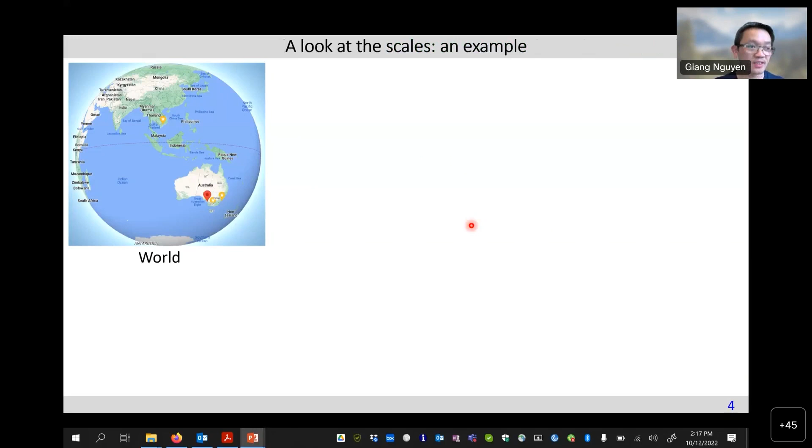So now I would like to take this opportunity to introduce Adelaide as well, but in a bit more technical way. So we have different scales. We are here in Australia, and if you look at Adelaide, this is Adelaide and the surrounding regions, and this is the Adelaide CBD. If we go to the university, the small square here is the main campus of the University of Adelaide. And where is engineering? Engineering is in this small quarter of that square. And our civil engineering is mostly in this building. Of course, we share the facility and building with another school as well.

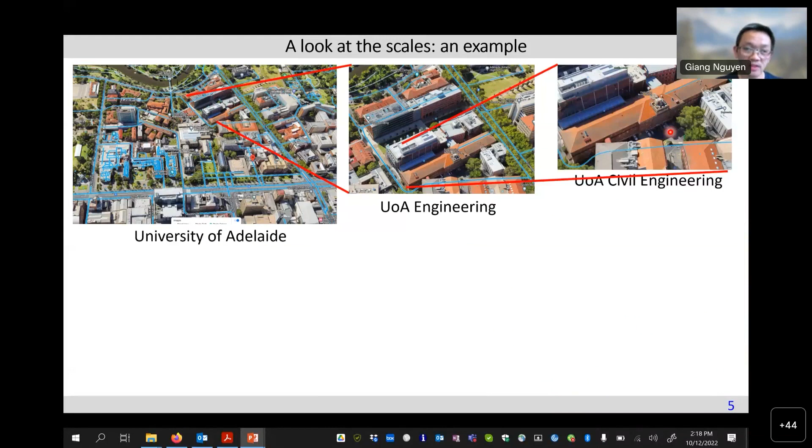We go to the entrance, we have this, but the question here: do we want to go further to a lower scale, like a lecture hall, laboratory, office, and so on? The answer is not always explicit, because it depends a lot on what we want to do. But in order to get an understanding, at least we try something first. Okay, so I want to see if, in granular material or geotechnical engineering, we can map the behavior of one grain to the macro behavior. So it's similar to having the behavior of all academics and predicting the behavior of the department, in the green color here.

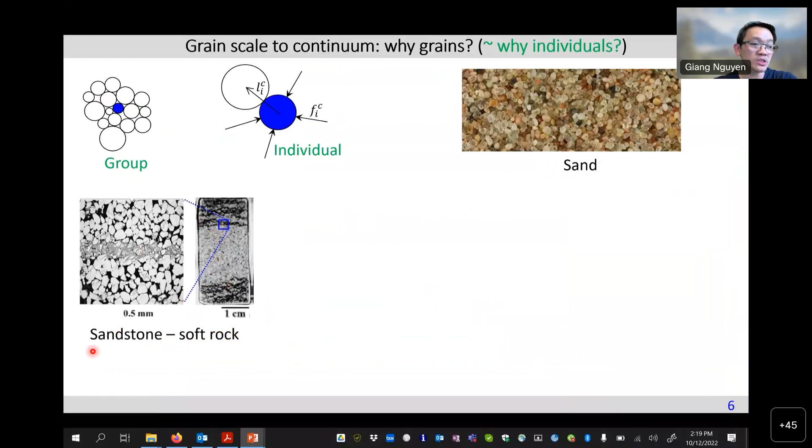So why do we pick grains? Because we are doing geotechnical engineering, and even wider than geotechnical engineering, geomechanics, we have the grain as the underlying structure of many things. Sand, you can see here, sandstone. If we zoom in, we see the grain structure. And the same thing with even hard rock, like granite in this case. The bottom line in this case, or not the lowest, the lower scale in this case is also grain. If you move to metal, you can also see the grain structure.

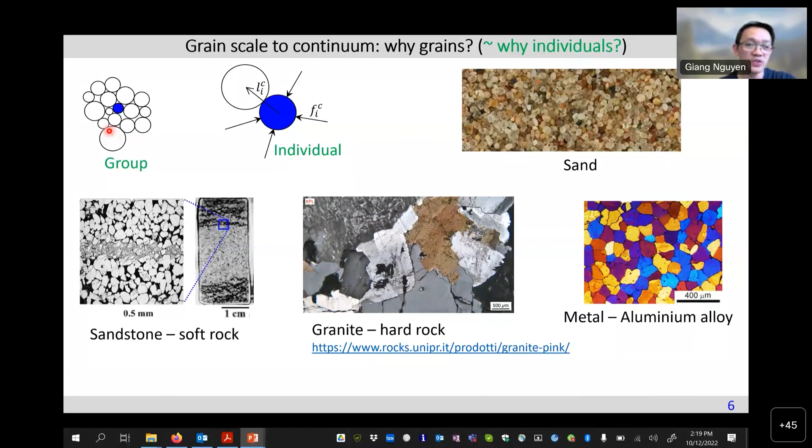So whether we can link the behavior of the individual grains here with the group is still a question. It's still challenging. So I'm not going to solve everything. I'm just giving you a few examples to show you the challenges. Okay, so assuming we know something here, the grain behavior, we have grains in contact with friction. Assuming we know the contact forces, we know the relative displacements between the grains, and to some extent contact surfaces.

So between two grains, we have friction, and we have the rules, simplest rules like Coulomb friction, written in this form, as you can see here. From all these things, can we make a link with the group of grains in this case? So that is the process called homogenization, and there are lots of approaches to homogenize individual grains' behaviors to constitute the macro behavior of a group of grains.

So that is a process called homogenization, or mapping something here to something there at the macro scale, where we have only macro stress, macro strain in incremental form. So it's like making a rule to translate or to predict the behavior or performance of a department based on the behavior of individuals. So in a loose sense, it's like that, and there may be different ways, different challenges as well. I'm sorry, any questions?

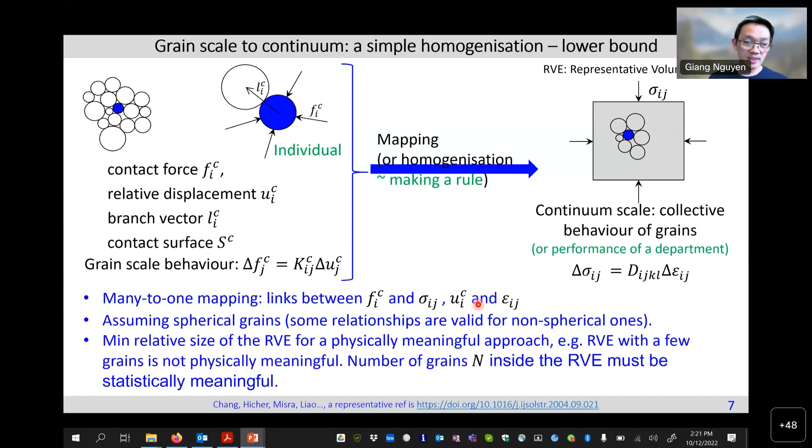Sorry, there is noise. Someone might have disturbance. May I ask everyone to please mute your mic? Yeah, sorry. I thought there were questions. That's why I stopped. That's okay. No, there are no questions, sir. Actually, there is some disturbance. Someone must have joined just now. Yeah, thank you.

So if you are finding it difficult when you read or look at the symbols here, the index notation, my suggestion is to look at this as a whole. So this is the rule we want to make here to predict the behavior of a group of grains or a department based on individual behavior. So that is everything behind what I want to convey here.

Okay. So we have to make a few assumptions here that I won't go into in detail. Say the individual, in this case, should be rounded somehow, like spherical grains, for example. And the group should be big enough because we're dealing with continuum behavior. We are not looking at individual grains in the end. We look at a group of grains, and the group should be big enough, meaning containing an adequate number of grains to make the behavior like a continuum behavior.

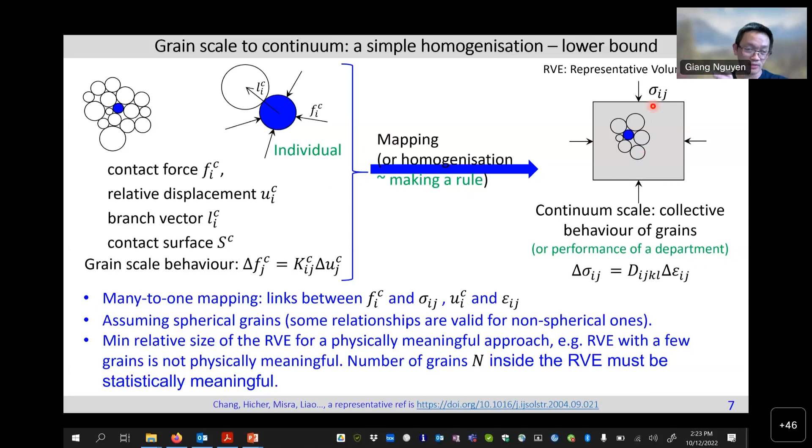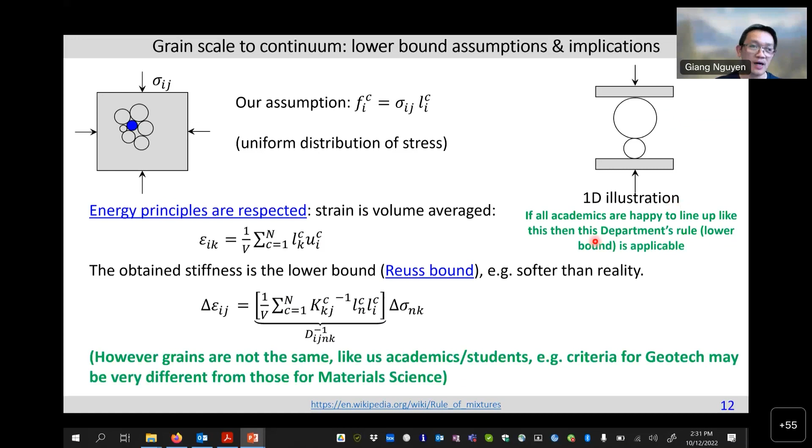So that is, in a loose sense, like that. So there, you've seen what is called the lower bound approach. There must be something called the upper bound approach. I will go quickly through here, but the difference is, instead of looking at the link between macro stress and contact force, we are assuming something here: the link between relative displacement and macro strain through the branch vector, or for spherical grains, the normal vector to the contact.

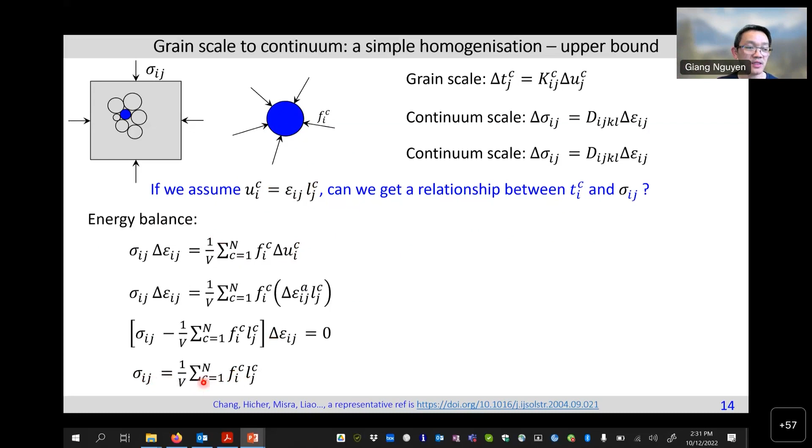Okay, so from this, we still need to maintain the energy balance, because that is something we need to focus on. We cannot make an arbitrary assumption and get something from it. We need to stick to the rule. The rule here, in a loose sense, is the energy balance. If we stick to the rule, we work out the link between the stress and contact force. So this is the relationship that has been widely used in the discrete element method.

So now we have the links: displacement with strain, stress with contact force, and the behavior of individual contacts. We do the mapping or homogenization in a similar way. Assuming no evolution of contact, we use all the relationships here. Doing substitution, we get in the end the relationship between macro stress and macro strain that takes into account the contact behavior and some geometrical properties as well.

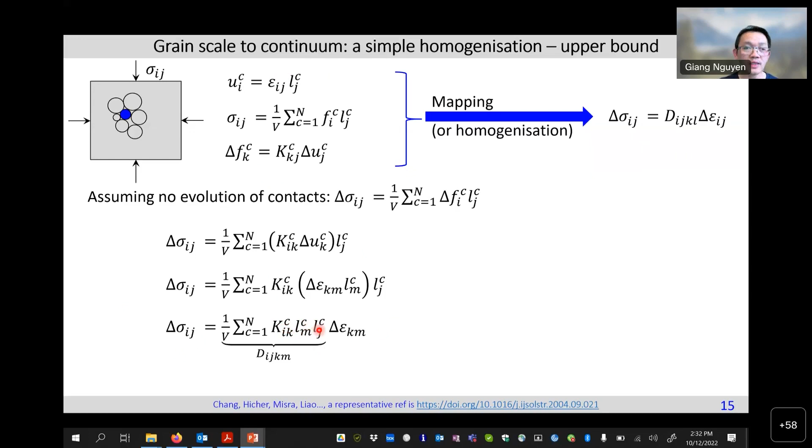And again, this is a particular case of strain arrangement. In 1D, it's like that because we assume the strain, or the displacement in a loose sense, is linking directly with the macro strain that way. So in the 1D case, it looks like this. And the result in this case is stiffer than the real behavior of the granular system. That means it overestimates the performance of the department if we assume all our academics are working that way in that structure.

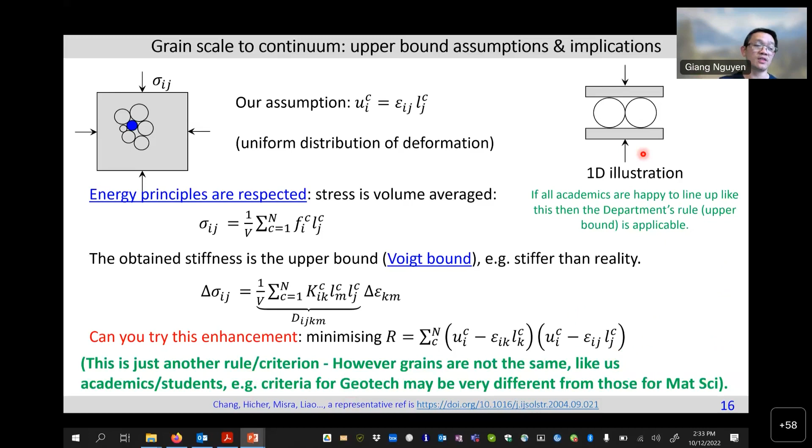Okay, I skip the details here for the enhancement, but I leave the very useful work here by Professor Chang, Hicher, Misra, and so on. With Professor Musmi, we learn from this very useful work. So again, this is just another rule that works well in one case, but not another. So with Dr. Musmi, we learn different things and we try different ways.

So in a loose sense, we're not looking at individual grains, but we have to look at groups of grains, because like we are in different groups, geotechnical, structural or environmental, we have different criteria. So we need a stepping stone between the individual and the department. That middle scale here is, in a loose sense, the discipline. We cannot map individual behavior directly to department response. It's very hard because we have different disciplines. That discipline in this case is our group of grains.

Okay, so if we do that, I skip the details here, I'm sorry, just to give you a taste of the challenges and the way we can go around to tackle them. So if we do that, we end up having something useful. This is the result of our research with Dr. Musumi. We haven't checked all the results yet, but as you can see here, there might be several different ways to map the grains' behavior.

So K and KS are the stiffness of the contact, and E and nu, basically, we are engineers, we know E is the Young's modulus, nu is Poisson's ratio. So these are the link between the contact behavior and the macro behavior. And to sum up our research, we got 8 different cases. But the problem is that we work out all these results from some assumptions. The underlying assumption is that there's no evolution of contact, and that is one of the key things.

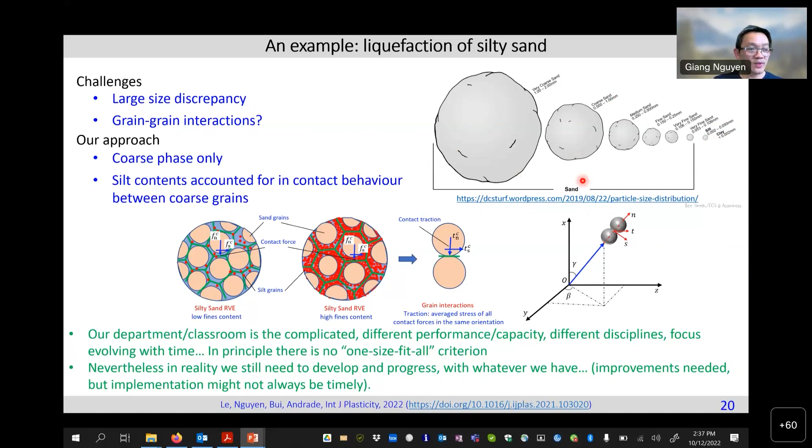So in order to do that, we need to make a rule. Our rule here is something that I have presented, the lower bound, the upper bound approaches. I might be mixing up these two things, but these are the rules that have been set. It's just valid for some configurations. We stick with that rule, we use it, even though we know that it's not correct. Okay. And now from the rules we established earlier, we set out the criteria for individual performance.

So our individual performance here, we have two grains in contact with each other, two big sand grains. In between is the silt grains. So we need to establish something that is sort of making sense for the behavior at the contact here that includes the silt grains as well. So I skip all the details. It just shows you the performance at the end. It's like we're predicting the performance of the department based on something we set out for the individual.

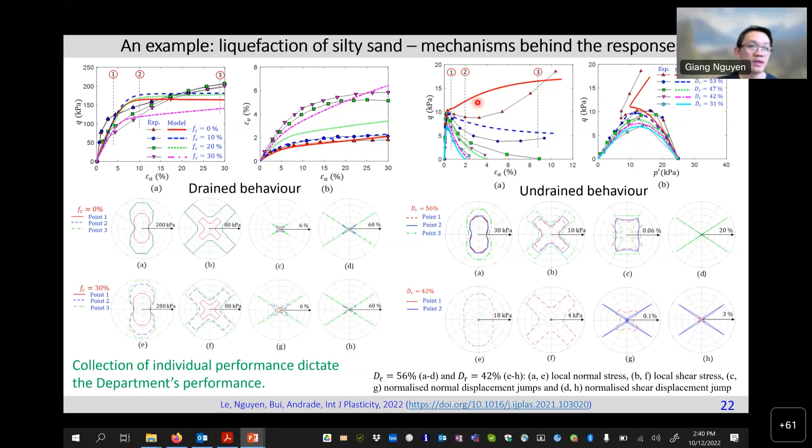Okay, so I make some conclusions here and move on to the next one. I hope I won't run out of time.

So this is challenging, but it is beneficial as well. If we do it in a traditional way, we set up a rule, we look at the macro behavior only, we may be able to do something good, but in the long run, it might not be easy because we lose the contact with the individual. We lose things at the grain scale. Okay, so we include the grain contact into our computational model. It is very time consuming because we have to track individual grains. It's like tracking the performance of an individual in the department.

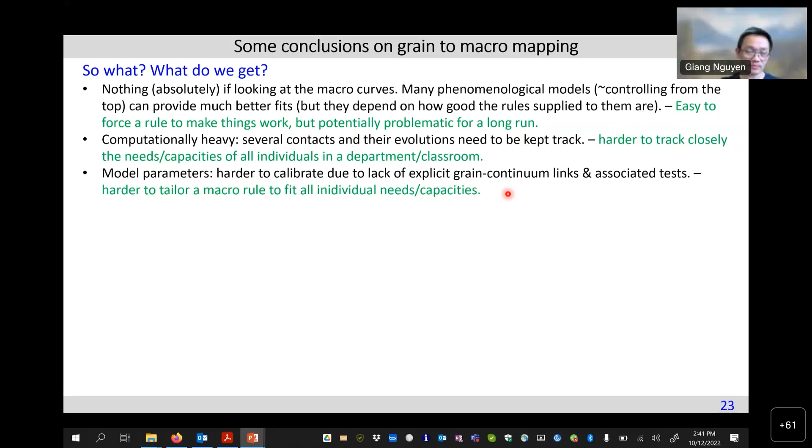Okay, and it's hard to establish a link between grain and macro behavior. But the benefit here is for the long run. If we make the rule correct, we will be able to predict something. Say if we have better computers in 5-10 years, that will help us overcome the challenges here. Okay, so curve fitting is a rule that you apply. Sometimes it works well, but many times it does not. So if we manage to establish a platform that makes everyone happy, it's beneficial in the long run.

Okay, and in geotechnical engineering, we usually use mixture theory, but the kind of homogenization here using different approaches gives us something better than the mixture theory. Okay.

So overall, it also depends on our choice. We can go with this kind of approach, looking at the grain scale behavior to predict the macro scale, or we go with our traditional way, more classical, imposing some rule at the macro scale and asking the model to predict something. So it's all up to us, because it's better to have more tools and models than less, okay, for different jobs. So this is just a taste of the challenges from the grain scale.

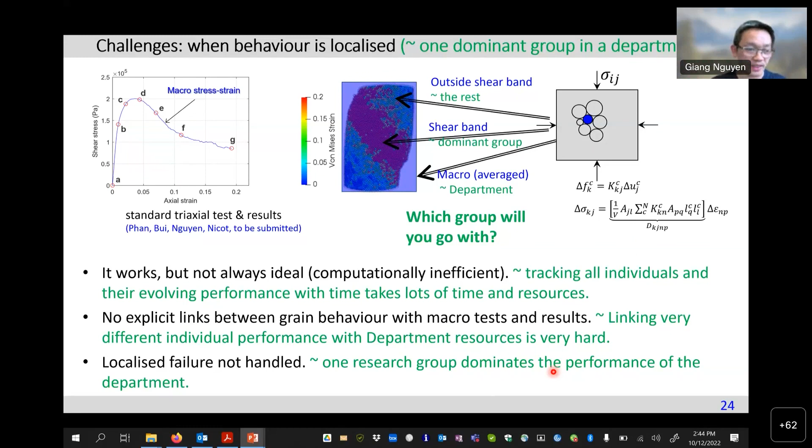So this will open something for the next part of the presentation. That is really important, because if we miss something here that is dominating the macro behavior, all we are doing for the mapping might be totally incorrect. So that is the last sentence here. If we have one big group performing very well and we don't distribute the resources accordingly to that group, that is something wrong. Okay. And I will open the next part here. I think it's short enough to give you a brief idea about localization, before we try something that can help resolve some conflict here.

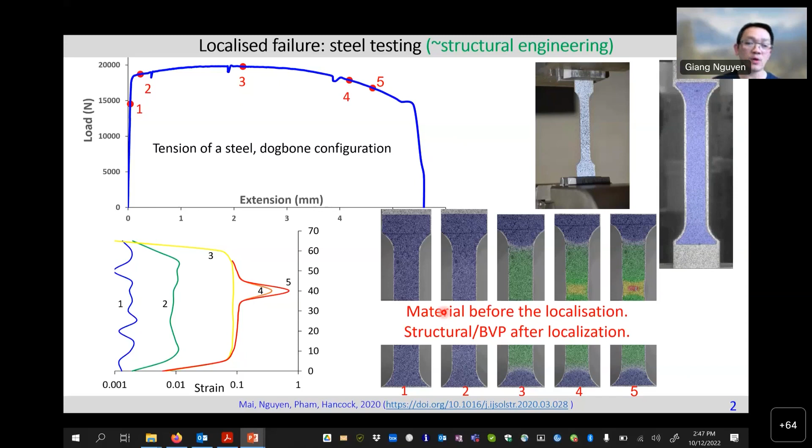The answer here is no, because the material of the specimen is transforming its behavior from a material in the loose sense, when everything is homogeneous everywhere, to a structural or boundary value problem due to the localization. So that is something we keep in mind first. And if we plot the strain at different areas, the global strain, that is the macro average strain, the light blue curve here, and the strain in the localization zone, where cracking in the end happens, we see something different.

We plot the strain evolution with time. We see the departure of these two strains. This point is called the bifurcation point. So still, we have the question, can we use the average strain here? I will try to answer later. Okay, so yielding in this case will lead to homogeneous deformation, but after being localized, the problem becomes much more complicated.

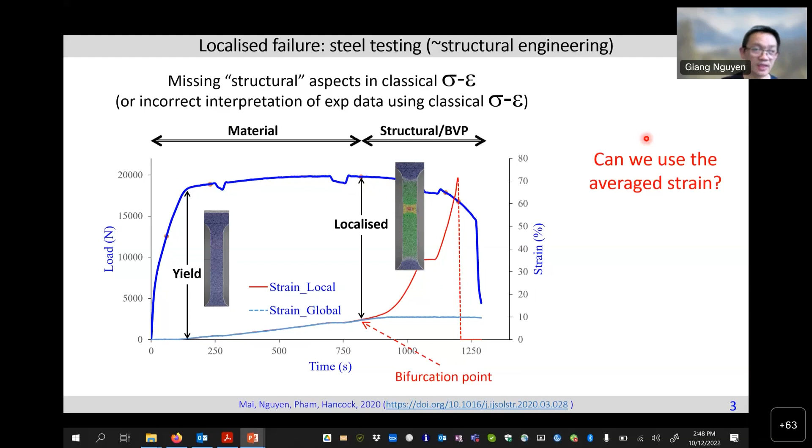Okay, it becomes a structural or boundary value problem. We do the same thing if we run tests for geomechanics, rock in this case. We do this, we record it, we plot the strain. You can see the strain evolution and intensive deformation strain here, very high in a zone that in the end leads to cracking, failure of the specimen.

We do the same thing, we plot the strain profile. We see that really after peak here, the strain tends to intensify in the narrow zone here, and it's in this case one order of magnitude when it's close to fracture, shear fracture at the end, compared to the strain outside the red zone here.

Okay, we can do the same thing to identify when that kind of bifurcation, keep in mind bifurcation of the deformation, takes place, when we plot the strain in 3 different regions, inside, outside, and the macro strain. So still, we put the question here, can the average strain be used or not? We try to answer that later.

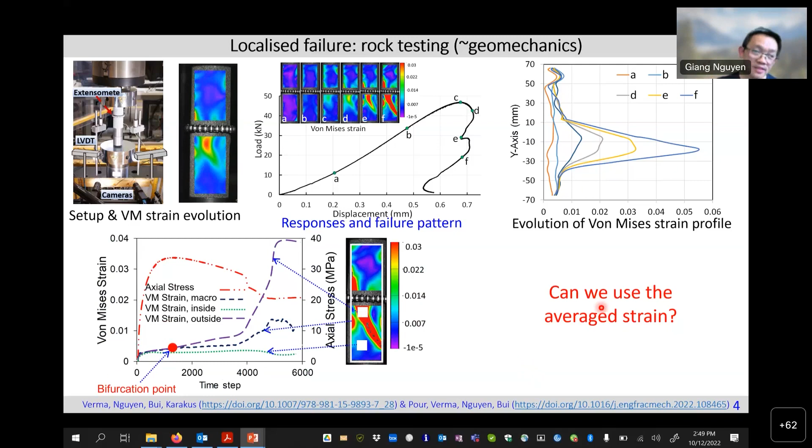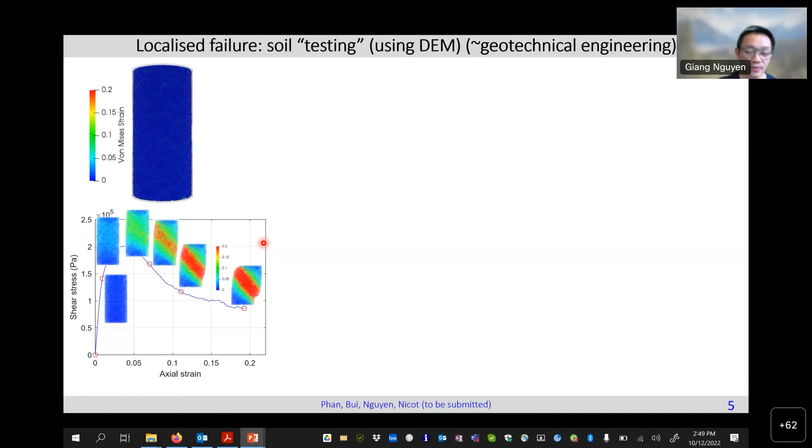So the last example here is geotechnical engineering. As you can see here, you've seen the video earlier. We do the same thing here. We try to, in this case, homogenize things inside the band and outside the band. Okay, or we put 2 big zones inside that band and outside that band. We work out 3 different behaviors.

So now it is sort of not easy. What behaviors should we follow? Say the macro one, the one in the middle, like the dominant behavior. The dominant group in this case is the green one, as you can see here. It is deforming a lot. The rest, not much deformation. This is going down that way. So which behavior as an engineer should we take to calibrate, develop a model?

Okay, so I give an example in 1D first to have more fundamental insight. So if we tension the bar like that, it cracks there. We put H as the gauge length, because in the end we need to work out strain from displacement. Okay, we tension it, it cracks in the middle. So because of the equilibrium, when the stress or force is starting to reduce, it's 1D equilibrium. The stress or force outside and inside the band, the red zone here, should be the same. Okay, so if the zone here is extending, leading to fracture, the zone outside it should be shrinking, because it's not fracturing. It's still elastic. Elastic should follow the elastic unloading path.

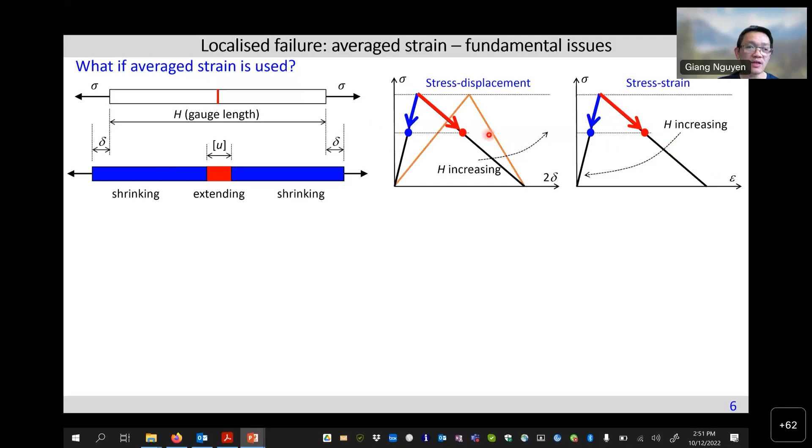Okay, so now we are an engineer. We need to work out strain. So what should we do? Basically, we divide the displacement here by the gauge length. We get this stress-strain. But if we change the gauge length, what happens? If our gauge length is increasing, we get a different response. Okay, if it is increasing, that means we record deformation over a larger area, so it is softer in this case, and we end up having this. If this keeps increasing, we would get that behavior, and correspondingly, we get 3 different stress-strain responses.

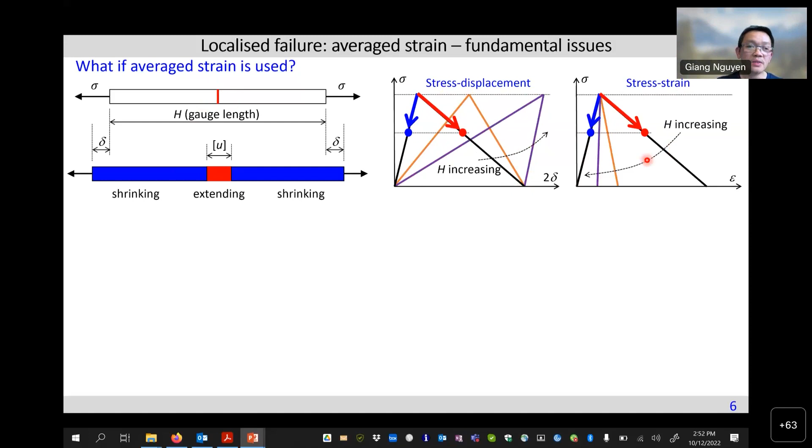So in this case, the answer here is that it's incorrect if we do the averaging the normal way, like an engineer usually does. Okay, because there's no unique stress-strain here that we can use. The fundamental behind it, I try to explain using the energy principle. Okay, so like you have a spring, you load the spring, so the longer the spring, the more strain energy you have. Okay, but in the end, the string will break at one specific point, regardless of how long it is. So in this sense, all the energy stored in the string will be dissipated, will be released at one specific point. And regardless of how long your string is, it will break at one specific point, and it is releasing the same amount of energy.

Okay, so due to that scaling, see, the energy dissipated is scaled with the surface area, but the energy storage is scaling with the volume. So these are very different. So fracture in this case is localized, and it happens at the weakest cross section, like a string. You break it at one specific point, that is the weakest. So in this case, if we do it the traditional way, we ignore the energy dissipation, we end up having just stress-strain. They're totally incorrect. And the stress-strain curve in this case for post-peak or post-localization, everything localizing, is not correct physically.

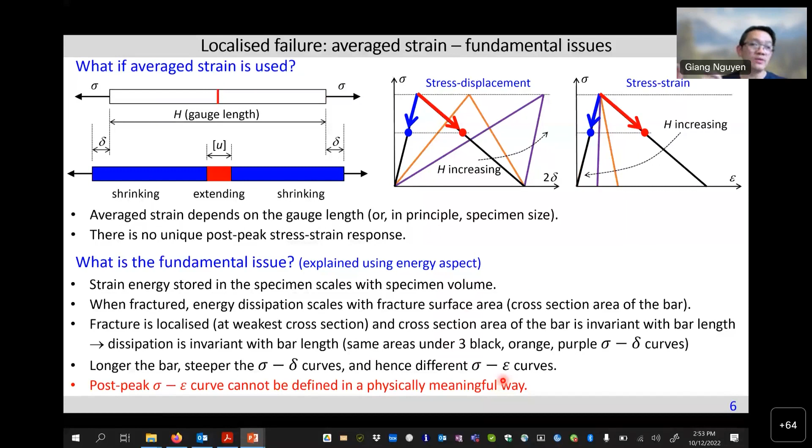Okay. So what do we do if this is incorrect? So this is a very quick example in ductile material. We need to record the energy as well, and this is the way they have been doing it to get the energy.

The energy in this case is the essential work of fracture for metal. Okay, so say I have the gauge length here. I change the gauge length from H1 to H6 here. I get different curves, because in this case our curves depend on the gauge length extension here.

Now, for each curve, I work out the area under each curve. For, say, H1 here, gauge length number 1, I have the area. For gauge length number 6, I have the area. I divide this area under the curves by the cross section area, and I plot them. I get in the end a straight line.

So this is not my invention. It has been there in the community of ductile fracture for 20-30 years. And if I plot this, I get a unique thing. There's an equation behind that I won't show here. So the line here, the slope, is the non-essential work of fracture, the work that is dissipated under plastic deformation only.

Okay, the intersection with the vertical axis here is the essential work of fracture. That means the work that is dissipated when we create fracture here at this location. So in this case, the conclusion is that stress-strain relationships are not adequate. We need to add something else, and that something else is energy dissipation, essential work of fracture.

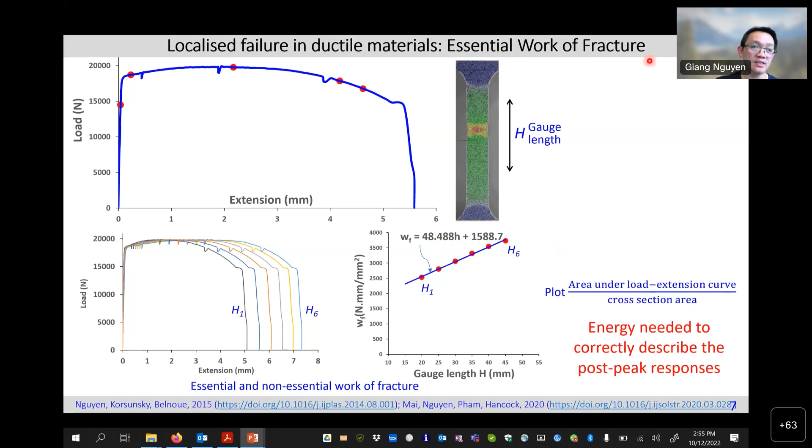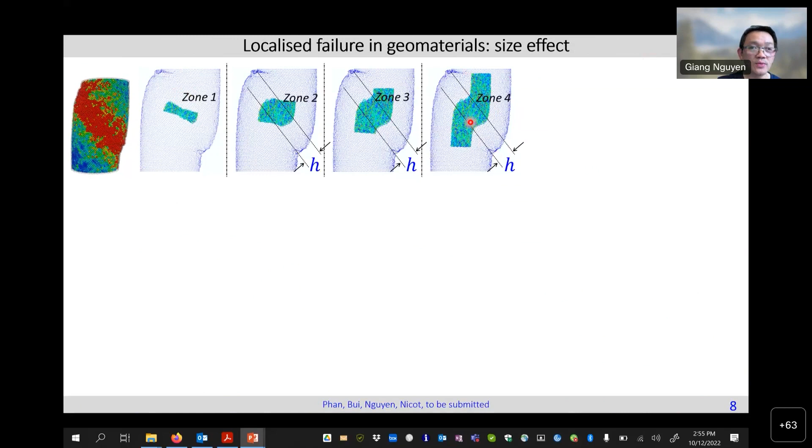So now we go back to geomaterial. We use the same example, and we try to work out different zones, 1, 2, 3, 4, in this case, across the band. Here, we do the same thing. We get the change in the stress-strain responses. And if we are geotechnical engineers, we look at volumetric behavior.

We see the response is changing with changing gauge length in this case, in loose sand, because in all 3 cases, the thickness of the band remains the same. So the only thing changing is our gauge length. Our gauge length is not a material property. It's our input. We want to measure strength over that gauge length, but the specimen is always localizing its deformation over the length h here.

So that length h is somehow the material property, at least in loose sand. It's not absolutely correct, but it's a material property. So the ratio between the size of the band and the gauge length is creating something called size effect, because we are varying H, but the material doesn't allow us to vary the size, the thickness of the band, because that belongs to the material.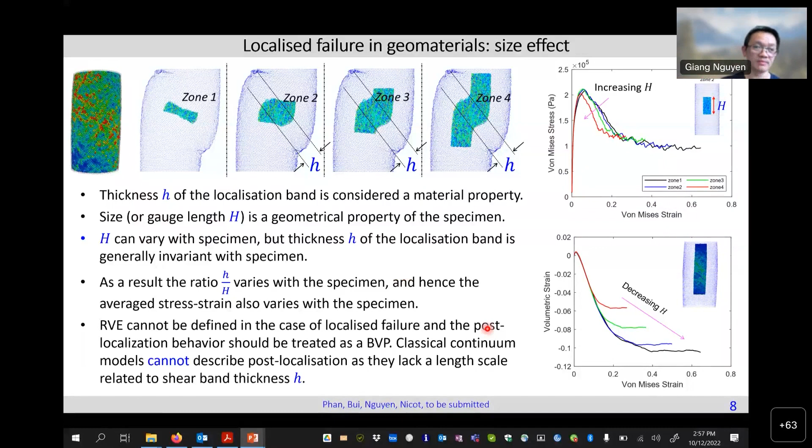Okay, so this is the size effect that we have to end up with, and in this case we cannot define the stress-strain relationship in a normal way. Everything is broken down in this case, so we won't go into the details, but move on to something that is really a bit more fundamental.

So we try to solve the equation. Say we have a stress-strain relationship with the softening branch. We want to implement it in a finite element and run it. And what's wrong here? Something I should try to briefly cover is the negative stiffness. There's no negative stiffness. The negative stiffness that we get in the end is our interpretation.

It's totally incorrect physically. And if we try to force it to work that way, we run the dynamic simulation here of stress wave propagation with a weak element following that stress-strain. In the end, it's blocking everything, because if we learn a bit about stress waves, we see that negative stiffness will lead to imaginary wave speed, and our system in this case is totally wrong.

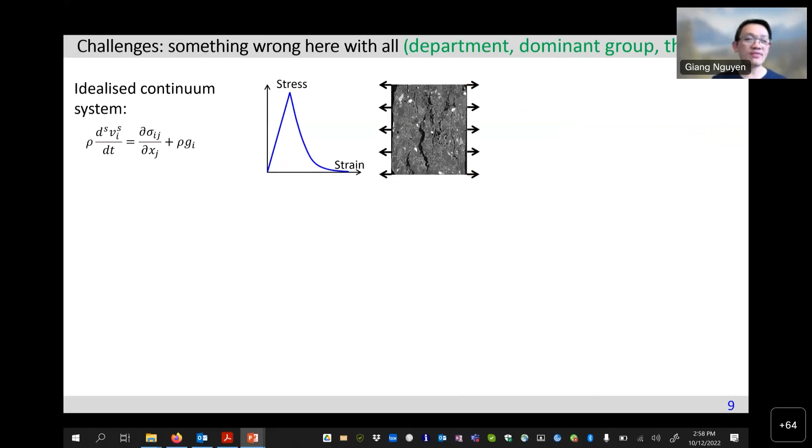But we won't have time to do anything now in this very short lecture. I think I'm running out of time, so I have to wrap things up. So I go quickly through this. Say you have a model that has some softening behavior, as you can see here. What do we do? There are different ways to handle this to make things work for us in the end.

We are engineers. We need things to work at the end, regardless of how wrong that is, because in the end we need to make some prediction. So there's some practical stuff that you can Google to find. I sum up 3 things here that I have first-hand experience with, but there are plenty of other similar regularization techniques that can be useful as well.

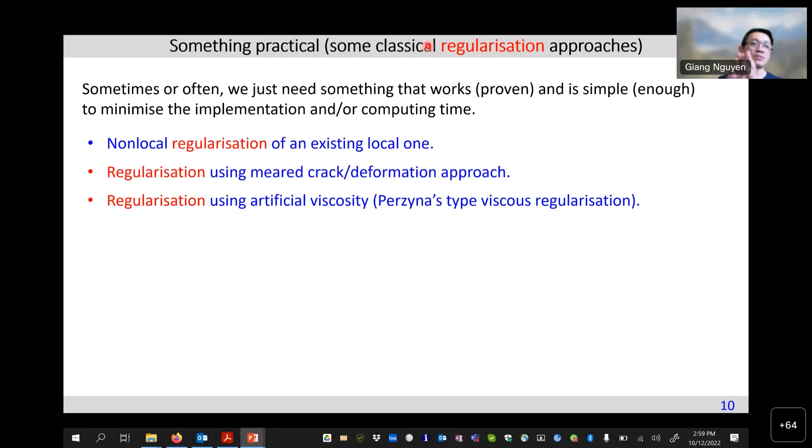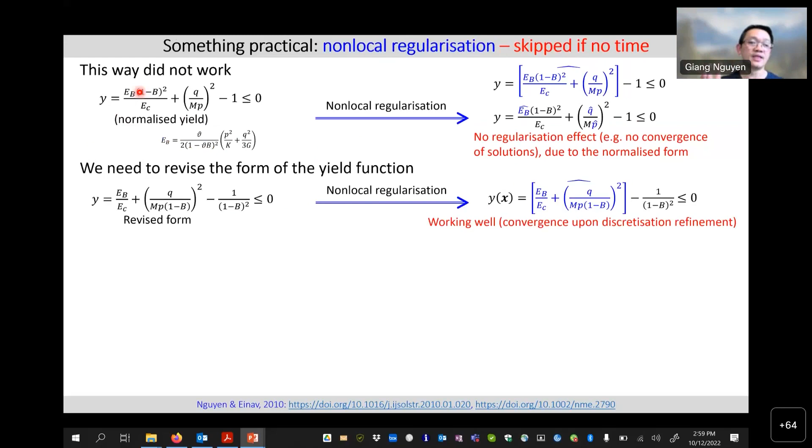So the non-local one, we won't have time for that. Sorry, this is smeared crack or deformation, and the artificial viscosity. So I'll go very quickly through here. Non-local one is to make more interaction between your integration point and the integration points in the neighborhood. So that's all. We can make a model non-local easily by putting the average integral into, say, the yield function or the effective plastic strain, accumulated plastic strain.

So if you have this in plasticity, you can make it non-local by summing up, doing the average weighting, whatever, to get the non-local quantity that can be used to run your simulation. That might work, okay, but you should be very careful. And I put the document here to list the issues with different ways to make a model non-local. Underlying, there's a lot of things.

The smeared crack, in a loose sense, is to scale the properties of the material, so that in the end, the model, our finite element or our integration point with the given size, is able to reproduce the dissipation energy, fracture energy, in the loose sense, that we got from the test and imposed on a model. So that's the case. So we're scaling artificially the behavior of the model to get something at the end.

Practically, it's very useful. I used that a few times as well, but if you go to large scale, it's not scaling well. Okay, scaling to large scale, very large scale, we will talk about that later, is very different and very challenging.

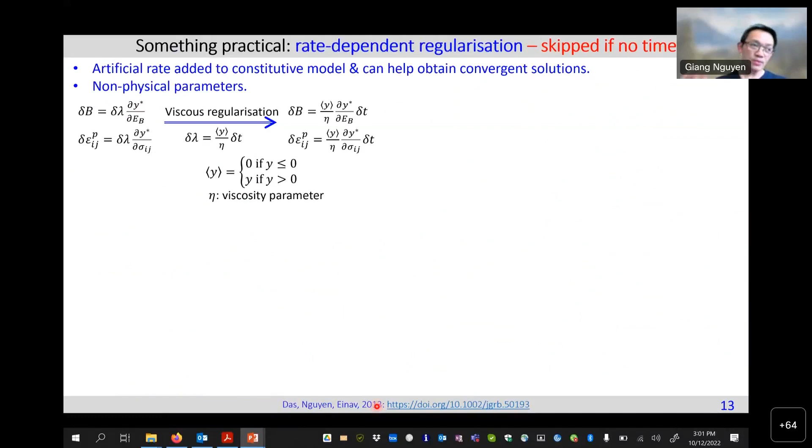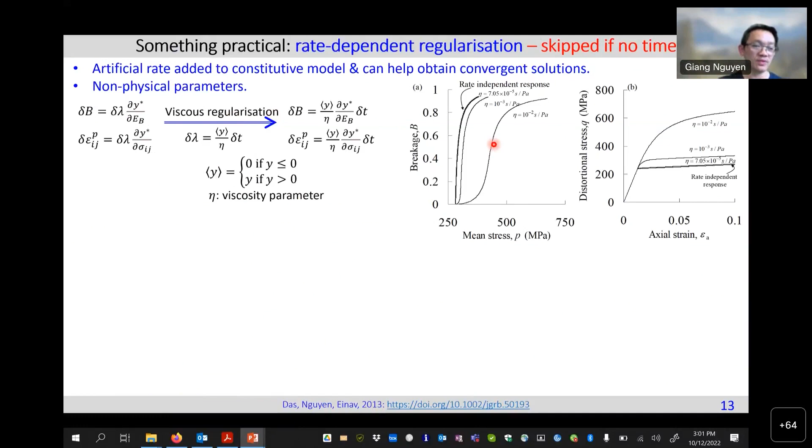So the last thing here that we did with Professor Das at Sydney and Professor Einav, is to add some artificial viscosity to make a rate-independent model behave like a rate-dependent one, so that it is sensitive to the rate of loading. So this is artificial. It has very little physics there, but it's useful. It makes things work nicely with a minimal amount of time in the implementation.

Okay, so we did something here to prove that without rate dependency and with different meshes, nothing will work. No convergence as you expect from finite element analysis, but with rate dependency added, we managed to get something useful. Although what we're doing here is artificial. Okay, so that's the issue.

And the last part here is my research with Professor Ha Bui at Monash during the last, I think, more than 10 years. We've been working together because we have some common interest in bringing more fundamentals to the practical application.

And I hope you can still follow me. I'm not making things boring.

So we try to work out an approach. It's just an approach, not the best, but for us, it is something useful. So that is something we want to convey here. So the challenge here is the scales. So we go from individual to group, department, university, and so on. The further we go from the individual, the more challenging it would be. Okay, it's like bringing our fundamentals of behavior of grains to the very large application in the field.

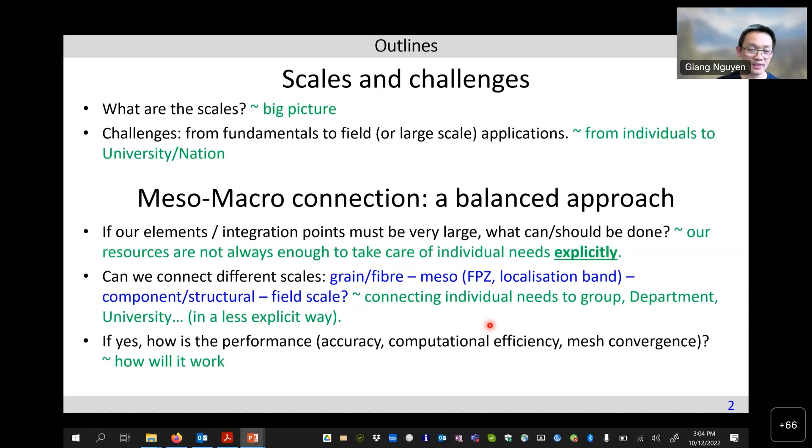Okay, so now I put many scales together, from grain or individual to field scale, where the practical application is really challenging. But what we are learning so far is at this scale, a group scale, whatever, if we are academic, moving to component scale, we can learn, we can do a lot of things because we have lots of data resources. Our lab allows us to do these things not quite easily, but at least manageable.

And if we have good computing resources, we can run direct numerical simulation, like DEM in this case, by Professor Ha Bui and his group. And we can see a lot at the grain scale, individual scale in this case, or something in between, mesoscale we call it, for the localization band. But we shouldn't forget one thing.

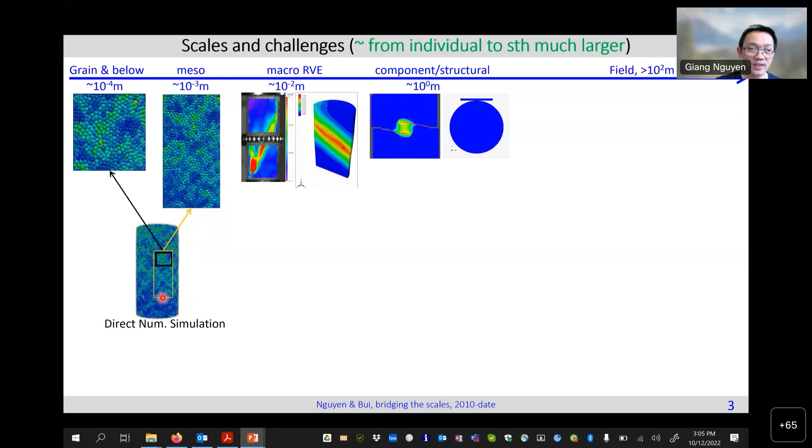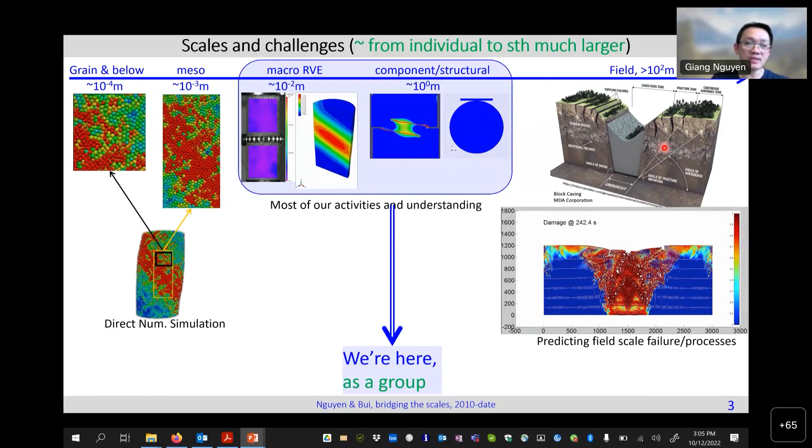All what we are doing here is for one purpose: predicting something. So I put here the challenges in one of our projects, block caving. The scale here is kilometer scale. So whether we want to model this at field scale, kilometer scale, from our understanding at the component scale here, and more or less the grain scale, if possible. Okay, so we're here as a group.

I need to check my computer. It's getting slow, so I hope it should not be crashing. Yeah, I'm sorry for that. Sometimes it crashes in the middle. Okay, yeah. Okay, I've tried now.

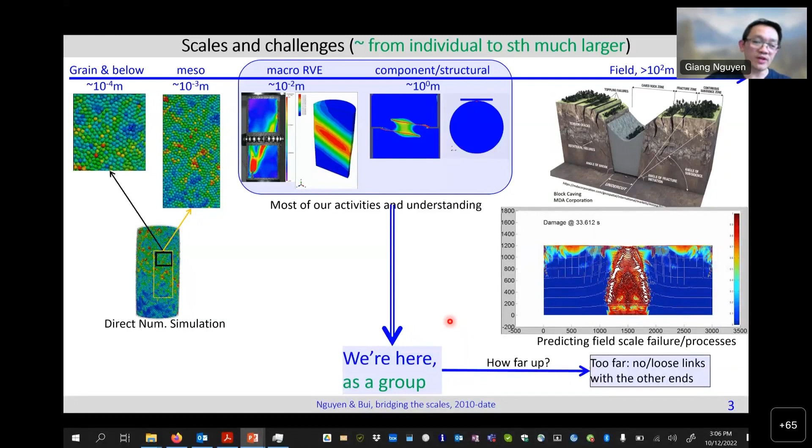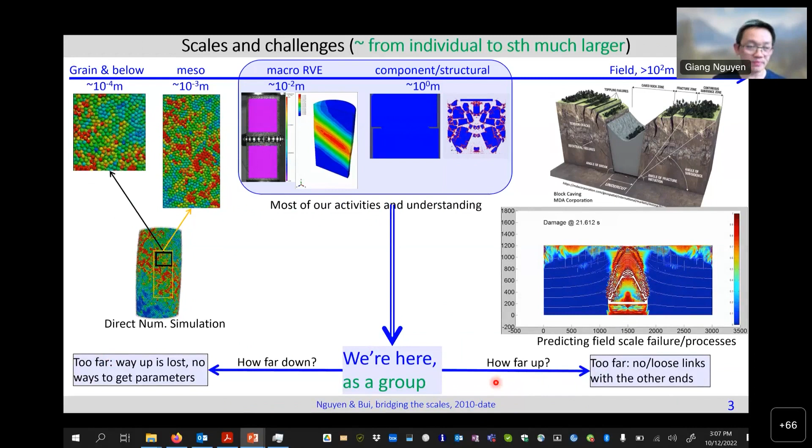Okay, so we are here as a group. We want to predict something at the large scale. If we go too far too quick, we might lose connection with the other end. Yes, if we want to bring everything from the lower scale to the large scales, it might not be possible because it takes a lot of time and computing resources as well. So the challenge is usually the prediction. We learn from the lab scale, component scale, we have data, but going to prediction, we usually do not have much data.

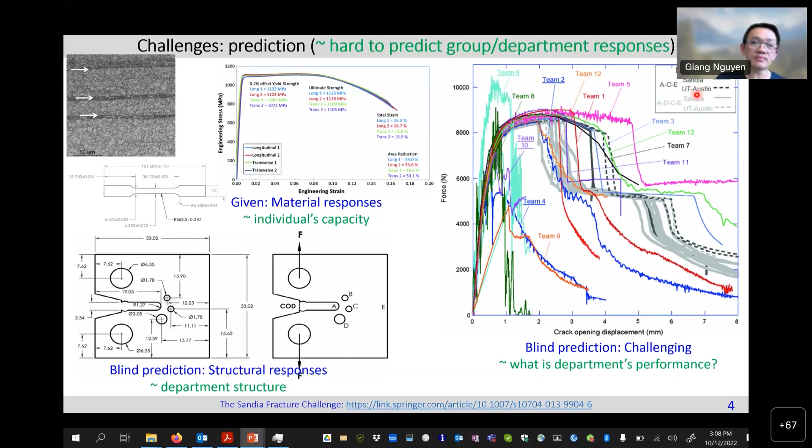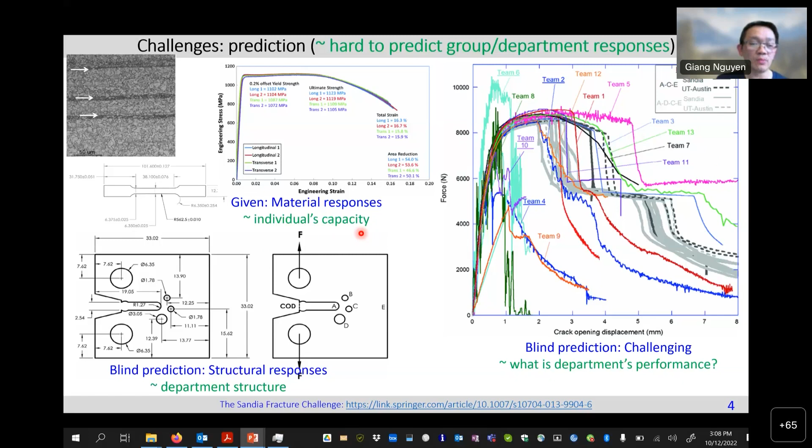Okay, so like we have individual capacity here given. We have the department structure. You can read this very interesting paper on the fracture challenge. They are given the individual behavior from steel testing, and the structure with loading, and they ask the competitors to predict the responses, blinding them from the experimental data. Experimental data were obtained from two groups, in dark and gray color here. You see 13 teams here have very different predictions. So this shows the challenge from knowing individual capacity and department structure to work out the performance of the department. It's very challenging.

If we want to go to an extreme, this is my work long time ago at the University of New Mexico, where we had to predict the fracture of ice in the Arctic at a very large scale, say 1,000 kilometer scale. In this case, our element size is 10 kilometers. With 10 kilometers, nothing we can do. We cannot bring the size of a grain, maybe meter, into the equation. So that leads to a few conclusions that were useful for my research direction after finishing my job at the University of New Mexico.

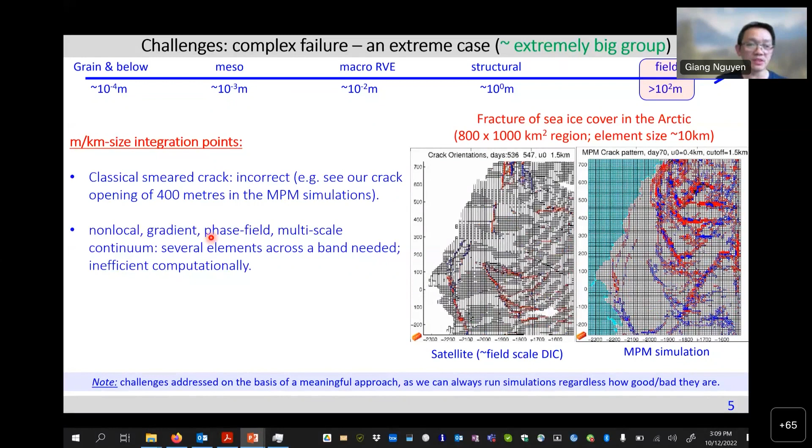That scaling is not the normal way. Scaling using smeared crack is not useful; it's not working well. We can enhance the model using advanced techniques. You hear a lot about phase field, multi-scale modeling, but it will never work here, I believe, because it takes a lot of time and resources at the large scale. We never get the solution if we do that. And if you go with the extended finite element or strong discontinuity approach, it will be challenging as well. First, the scale. Second, how to make sure we have the correct description of several intersecting cracks branching and propagating like that.

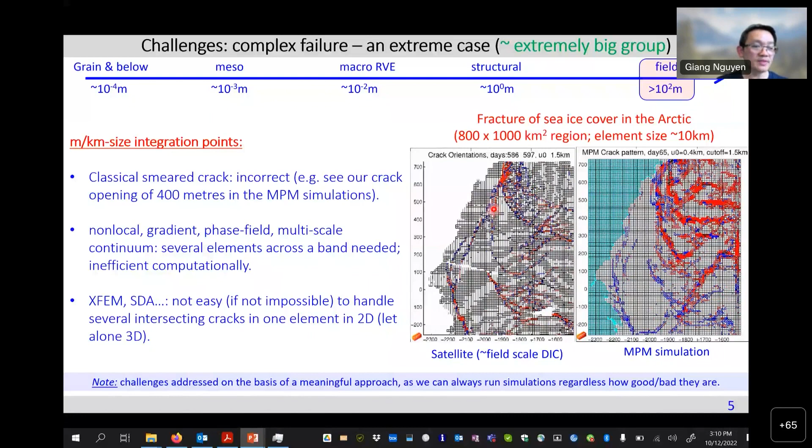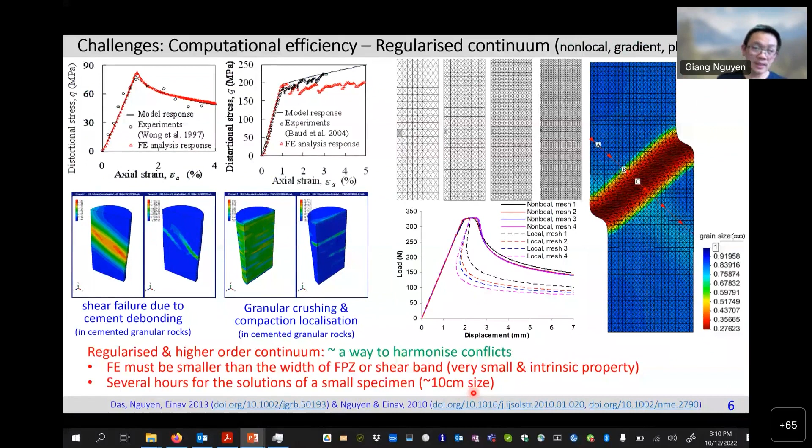Of course, we can do something. I give you an example that we did with Professor Das a long time back. We can run simulation at the small scale, but to give you an indication, it takes a lot of time to finish the simulation for 10 centimeter size. So we won't be able to use all these fancy things for the large scale. That's one conclusion.

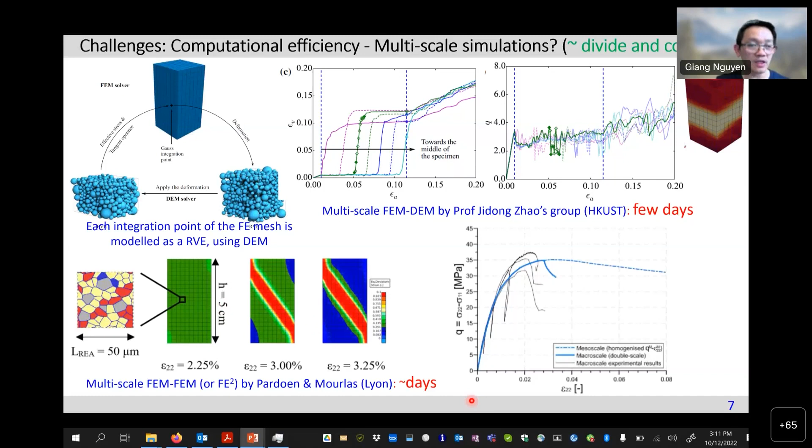We can go with the multi-scale, like divide and conquer. So we have one integration point. We make that integration point multi-scale by having an RVE using DEM, in this case by my colleague at HKUST. When we asked him how long it takes, he said a few days. I had another chat with another colleague at Lyon doing similar things for FE squared. As you can see, it would take a few days for the prediction of failure of a small specimen.

So now we have to develop something that has the balance. I'm sorry, I'm running out of time. And in a loose sense, if our group or department is too big and it has a few dominant groups, say the localization band here, we can call it fracture process zone in fracture and damage. How many bands, how many dominant groups can we take into account in the model? We cannot go down to the individual in this case.

So, knowing this capability of this group, can we work out the department response? So that means going from meso group to macro in the loose sense. You see the prediction here. We see the band. We can work out the evolution of the thickness of the band. Okay, it's evolving, but it's really hard to take the evolution into account.

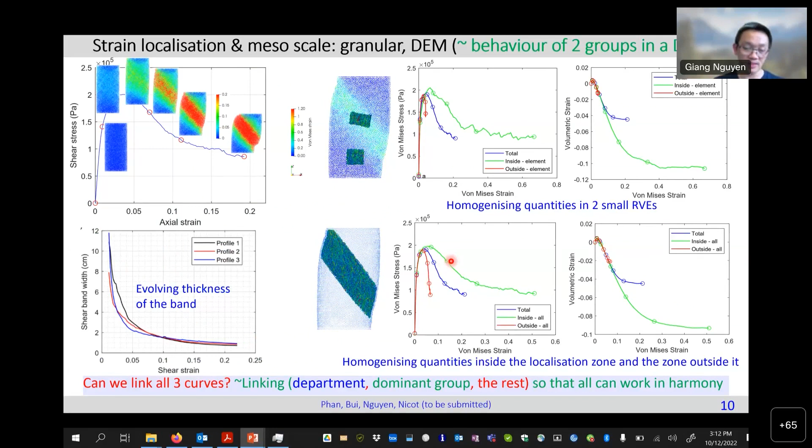You have seen the behavior inside the band, outside, and the macro one. So now the question here is, can we link all three curves? They behave together, as you can see here. What are the relationships? Okay. We do that. Don't pay much attention to this. You can read the papers or something else later.

So we use a strong discontinuous approach, but we regularize it over the width of the band to have the strain inside the band that way. That strain inside the band, the dominant group. And if we do that, we look at the configuration of a specimen like that. We have the strain in red inside that red zone. The strain outside the band is blue here. The macro strain is the black one here.

Okay, so we have this relationship. We would manage to sort of work out something. And the details here are too much. I leave it there for you in case you need these details for checking or for further understanding, but I will go quickly through it.

So in order to establish something, we need to resolve the conflicts first. Our conflicts here are something like friction between the zone inside and outside the band, okay? Like these two, they are sliding against each other, as you have seen earlier. So we have all the links here, okay? We have the behavior inside the band, outside the band, okay? We try to link all of them, okay?

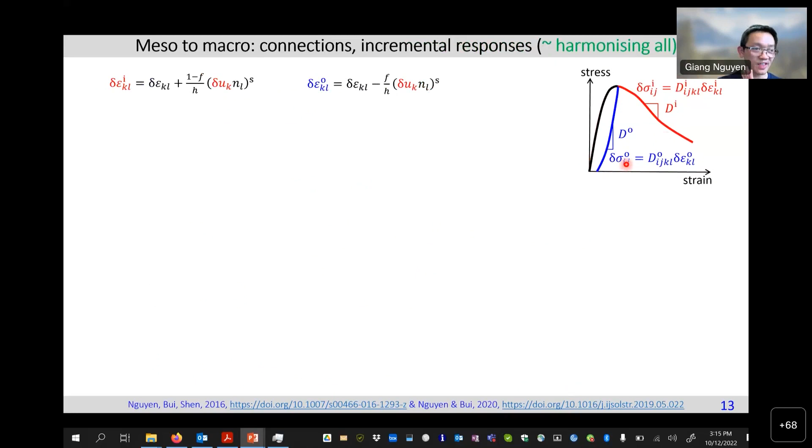So we have these rules. We have established the kind of rules here. We can work out in the end something linking all behavior, red, blue, with the macro behavior. I skip all the details here, okay? That requires quite some amount of time to work out, but the key thing is to use the traction continuity here and the strain in different forms inside and outside the band, and their constitutive relationships are different.

So we work out in the end the link between macro stress, macro strain, taking into account the behavior inside the band, red, outside the band, and of course the volume fraction F here. Well, I skip that just for making things faster, and the orientation of the band.

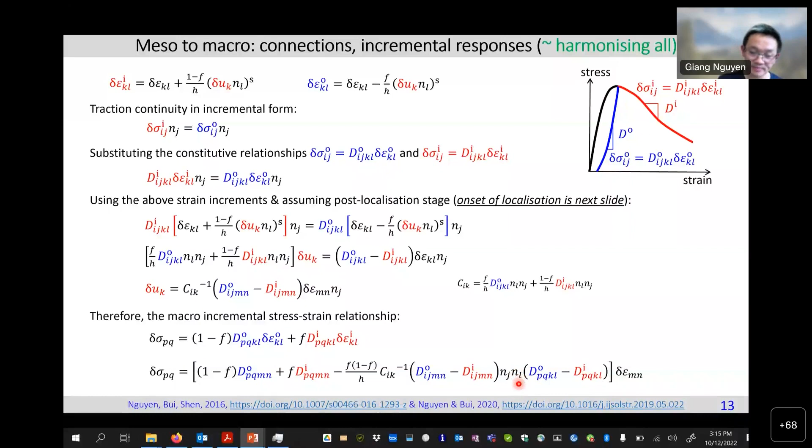So the summary, we have established something from meso to macro, like from a dominant group that dominates the behavior of the department or the behavior of the macro specimen. We make the link, we use their interaction to work out the relationship here. The relationship here is explicit. That is one thing we should keep in mind. For non-local, for other things, it's implicit, so that makes it hard for calibration. So the relationship we have here is explicit. That means we can work out one thing from another.

Say working out macro behavior from micro behavior, from meso behavior, or if we know the meso behavior, the dominant group, we can predict the performance of the department somehow in a loose sense. Okay.

So you have seen this relationship linking almost everything we have, but not everything. We skip the grains' behavior. The grains' behavior is lumped into that D here, inside and outside the band. We don't have that here, but we have the behavior of the group of grains inside the band and the behavior of the group of grains outside the band. Okay, they are described by that D, red DI, and DO, the blue one.

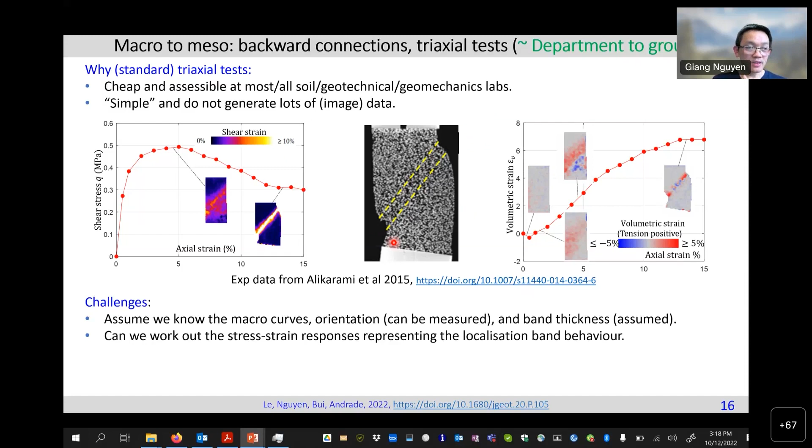Okay, we have to assume something. If we run tests, normally we can measure the orientation roughly. We can assume, and that is the point I want to go further in this case, we have to assume the band thickness to make things easy. Can we work out the stress-strain responses inside the band and of course outside the band?

So now the question here, this is to me really important because it's been not correct in the community for a while. We do the averaging, we don't care about the mechanism. We end up, to my understanding, with something very wrong as the material behavior, because we don't have any mechanism to track or to record the localized behavior. You can follow the slide or read the paper later.

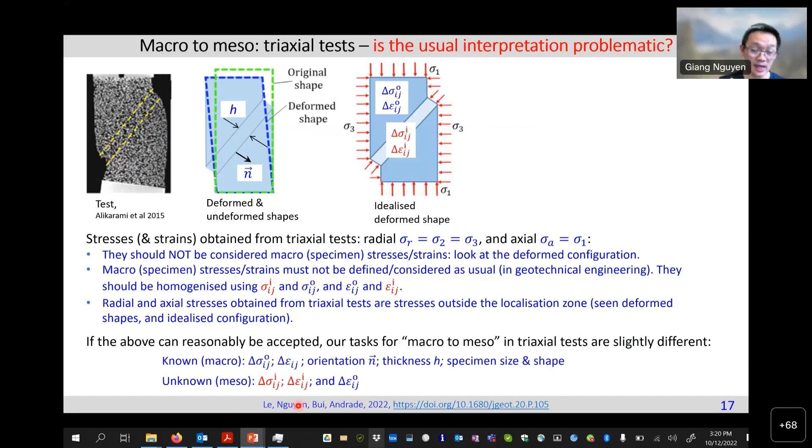So say in the loose sense, our way to distribute the resources in the department to the dominant group, in this case the red one, is usually not correct, not fair. They perform well, but they got less resources than the guy outside the band here.

So if we do that, I will skip all the details. We assume elastic outside the band. We have the stresses, we have the psi, we have these things. We can work it out from the macro test data. I use the X-ray data here, but actually we don't need the X-ray strain contour.

As long as we have the macro data, stress and shortening of the specimen, not strain, shortening, because it's getting shorter but there's no average strain that can be defined. The macro strain cannot be defined correctly here. And with the angle of the band, we can work out something useful. Inside the band is following that. The macro here is what we usually get in the loose sense. Outside the band is that way.

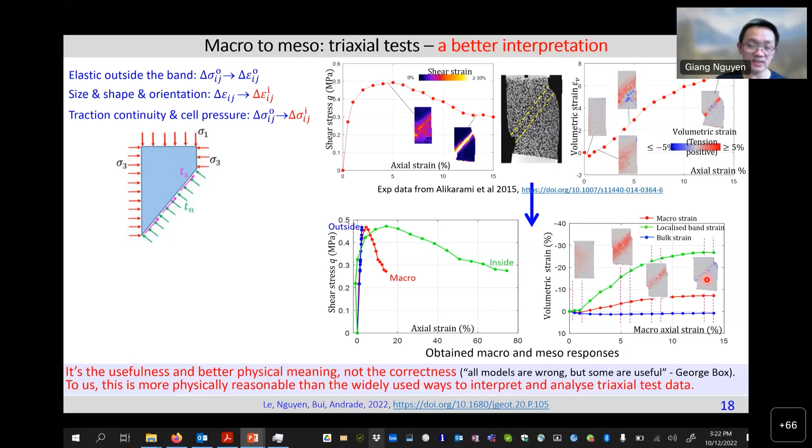If we want to look at the volumetric responses, we will have three different curves. So now it's up to us, but truly the material intrinsic inelastic behavior that is dominating the behavior of the specimen is the one inside the band. That is the green one here. This is the one we should use for the calibration of our model and for our understanding as well. So in this case, we have found a way to distribute the resources to the best group in the department.

So the last few slides I will go through quickly are the benefits. We have done a lot, but sometimes what we have done could be useless. So the question here: you have done a lot, Giang. What is the usefulness of your research? Okay, so now I should go quickly through.

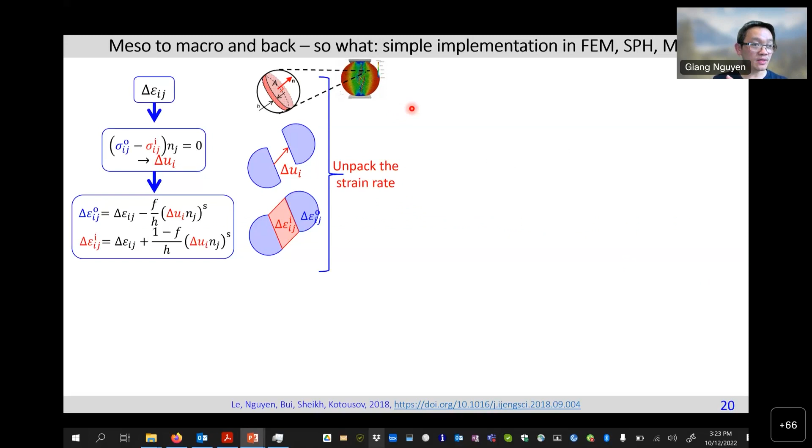We use the approach, we have the band inserted in one particle, or say in the loose sense an integration point, but it's not always correct if we say integration point. We can implement it in any numerical approach, FEM, SPH, or MPM, with good prediction. It seems it can work well if we find a way to distribute the resources. So we can apply it to different disciplines.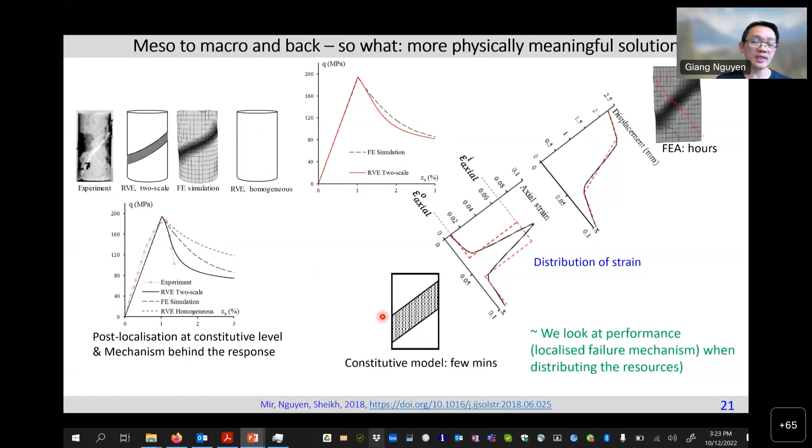And now the other thing I want to address is the mechanism behind the macro response. So normally we run the test, we don't care. We assume everything is homogeneous, but it's not always the case. So in this case, we can work out something with the mechanism behind. So we look at the performance when distributing the resources.

Of course, what we want to know is whether it's converging. We are either structural engineers or geotechnical engineers. We want mesh convergence. We want to refine the mesh to get a better solution, but we want it to converge to something. So that is the demonstration.

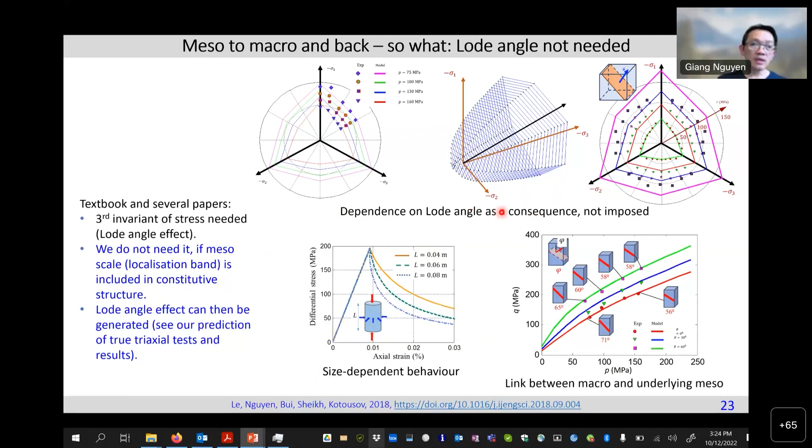And the other thing is, if you are familiar with the Lode angle or the third invariant in geotechnical engineering, these are the things we don't need at all. Okay, we can generate the effects of the Lode angle from the mechanism behind it, not having to impose something. And we can make correlation.

So we extract, as you can see, the behavior of the mesoscale, the band here. We can work out a model. We can sort of even calibrate or validate that model, and we implement it in the macro constitutive structure to get the prediction. Okay, we see the mechanism behind the macro responses here.

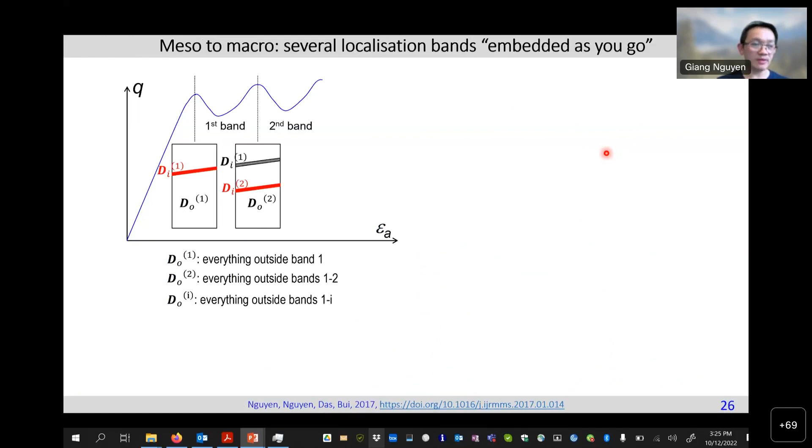Other thing is the efficiency. We have run this one in collaboration with Professor Das here, maybe five years ago. We ran this with Abaqus, but the question here is: can we beat Abaqus? Okay, it took us 9 hours, but if we know the mechanism behind this thing, we can do it in a much cheaper, faster way. I skip all the details here just to give you an indication of the performance.

And we can manage to get something comparable, not exactly, we never beat FEM in terms of accuracy, but we beat it in terms of computational efficiency. We capture these things, the trend, but at much lower computational cost. And we go back to this.

I showed you this. It took a few days for multi-scale analysis, but just a few minutes if we know the mechanism behind, and we can do it correctly at more or less the material, not precisely material, but at least it is an enrichment that we can do to capture something that finite element or multi-scale analyses take days or hours for.

So can we add more? Say we have the band, we have the macro RVE, can we add the fiber? We can add the grains. The answer is yes. We tried that too with fiber reinforced concrete.

We have the macro RVE here with the band in the middle in our structure. We can look at the mesoscale of the band and look at the fiber at that scale. We can insert the model of the fiber, in this case pull-out, with validation. We can do validation at the mesoscale and even structural validation. So in this case, we try to incorporate individual behavior to group and to department to get some useful prediction at the end.

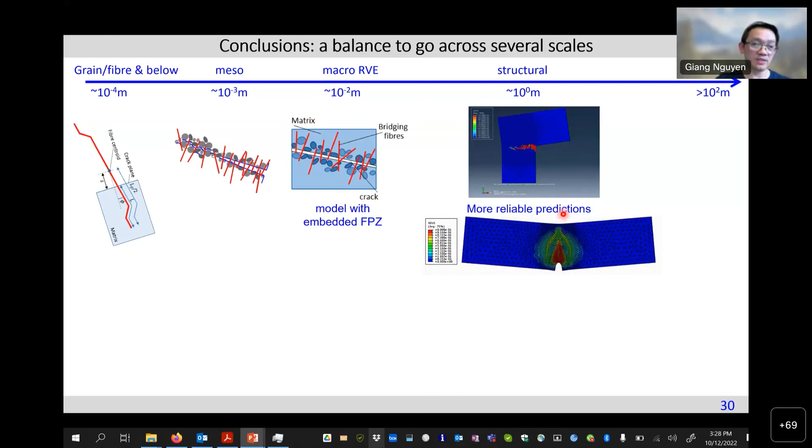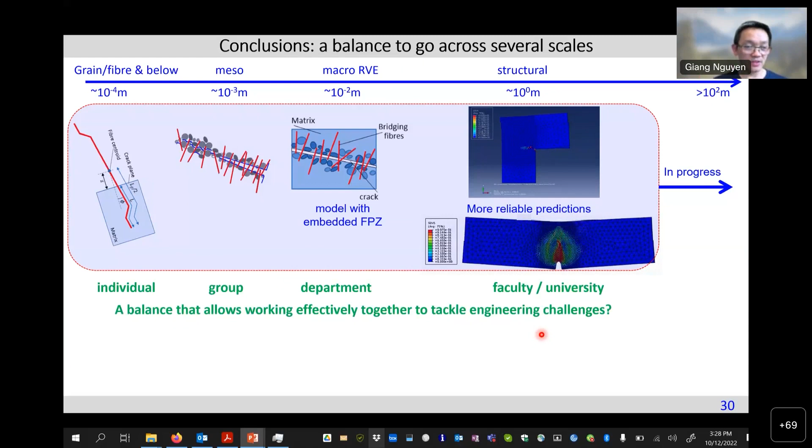And we can go further to the far end where we want to predict something at the field scale. So it's like working out individual, group, department behavior for something that we can predict. And if we have a balance between several things, that will help us tackle several things at the end. So with that, I thank you for your attention, and I put a note here that all we are doing might be totally wrong, but we look at the usefulness of our approaches. Thank you very much.

Thank you so much, Professor. It was very interesting and useful. We were listening to you and thought not to disturb in between. I hope I'm audible now; we had some technical glitch at the start. Am I audible? Sorry, this is the question time, I guess. Yes, that's very clear now. Thank you very much, Giang, for this insightful talk. I heard everything. Thank you very much.

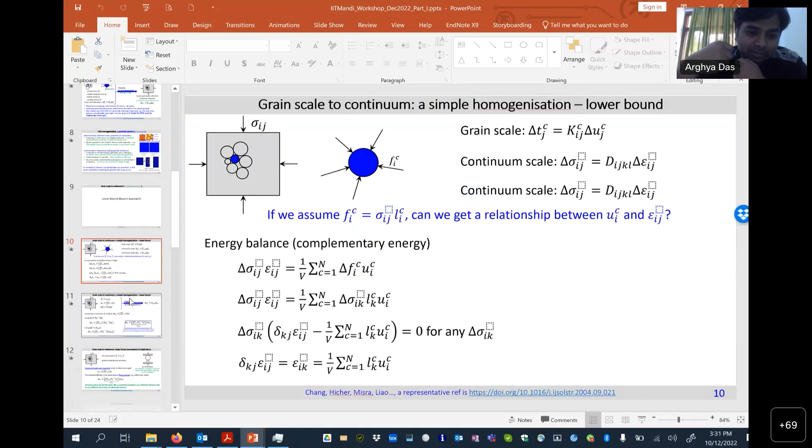Yes, Arghya. Yeah, so my question is that you have some sort of an assumption that the contact should remain there, right? I mean, the same contact between two. Yes. But it's, so don't you think that kind of assumption will, for example, in case of granular materials or soil, we see dilation when the particles are going away. So these kind of assumptions will hinder those dilation processes or something, don't you think?

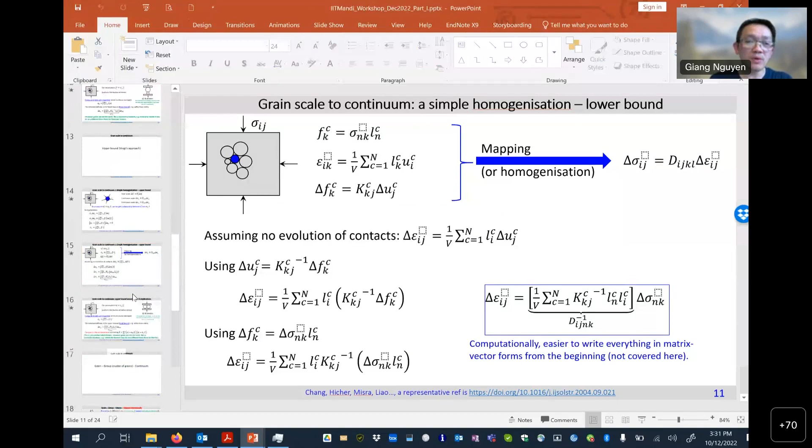Yes and no. I don't have a good answer for your very good question. So I guess this is the question, right? Yes, yes. So we did that. We don't have any issue with dilation. It can capture things well, because in the end, it's a fitting exercise. Fitting in this case is shifted to the grain scale with that constitutive relationship. So your constitutive relationship, as I have shown you here, can be modified or calibrated at the grain scale, so that in the end you would manage to generate good dilation macro behavior here.

The only challenge that we cannot solve is the cyclic loading. If we fix the contact orientation, we wouldn't be able to capture cyclic loading correctly. That's the challenge, and we have tried somehow to make the contact evolve a little bit to capture cyclic loading. But the question about dilation or not, I think it is not the main challenge here. Okay, thank you. Yeah, thank you.

Any other questions from the audience, please? Yes, Dr. Dey, please go ahead. Professor Giang, good morning. Yeah, good to see you, Arindam. Yeah, it's very nice to listen to you after a long time. Thank you very much. I was very interested in listening to your talk. So I have a small question from my side.

When you were talking about this bridging between the macro and the meso scale, I was very eagerly looking into the videos about whether the applied stress we can consider really as a macro stress or not. Yes, yes. So I just want to mention that earlier with one of my PhD students, we had carried out a lot of triaxial experiments where we had also used on-sample transducers. At the mid height of the sample, we had attached vertical as well as radial miniature transducers to measure the on-sample vertical and radial displacement.

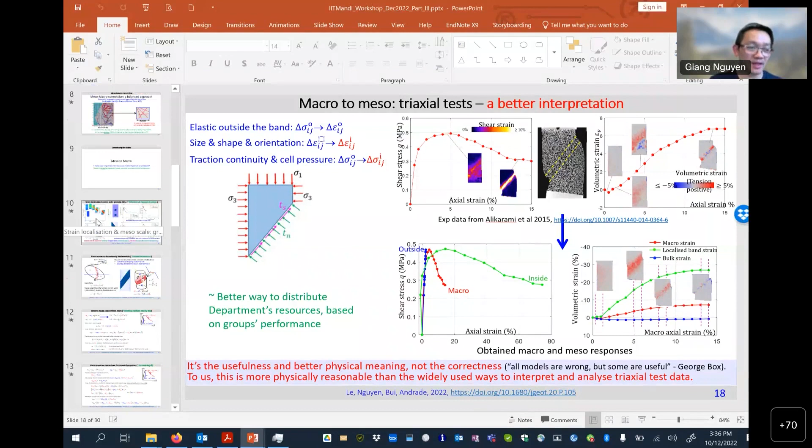So I have one question regarding estimation of band thickness. How do you estimate, how do you quantify the shear band thickness? Which parameter? Yes, that is a very good question, and that is one of the challenges here. So I guess this is about this band thickness, right? We learned it from a colleague at Duke University, Professor Manolis Veveakis. How do I put his name here? I can type here.

Okay, so you see my typing? Yes, we can see. Yes.

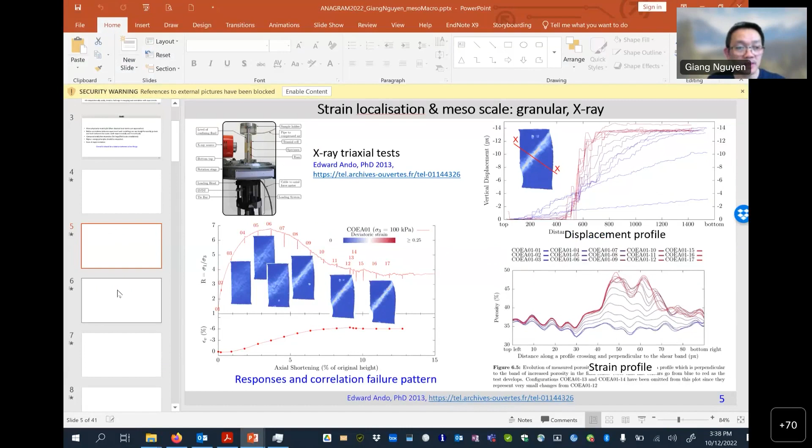Duke University. And the key thing behind it is that you need to plot the profile of strain across the band. And I can show you here in one of my early presentations. Yes, so say here, if you run a DEM experiment or any experiment that allows you to plot the evolution of strain across the band, as you can see here, then you can use a kind of fitting in a loose sense. I think they use the Gaussian distribution with a length parameter.

So if you manage to fit this profile with some parameters of the Gaussian or some form of distribution that has a length scale, the perfect fit will give you an indication of a length associated with the fit. So if you do that for different profiles, you get the evolution of the band thickness. That is in one of the papers by Professor Veveakis at Duke University in Géotechnique. So I hope you can record the name and Google Géotechnique; I think he published it this year, 2022.

Okay, so I got mine. So thank you very much.

Yeah, thank you. Giang, in that regard only, I have a continuing question. When we showed this plot for the thickness calculation, it was strain. Now, when we have DEM simulation, we have multiple parameters. We can have an assessment over relative displacement, rotation, and strain also. What we noticed while doing the fit is that all of these parameters may not give the exact same length of the shear band. The relative displacement is more of an independent parameter rather than strain. So any observations on that? Which parameter might be a better quotient?

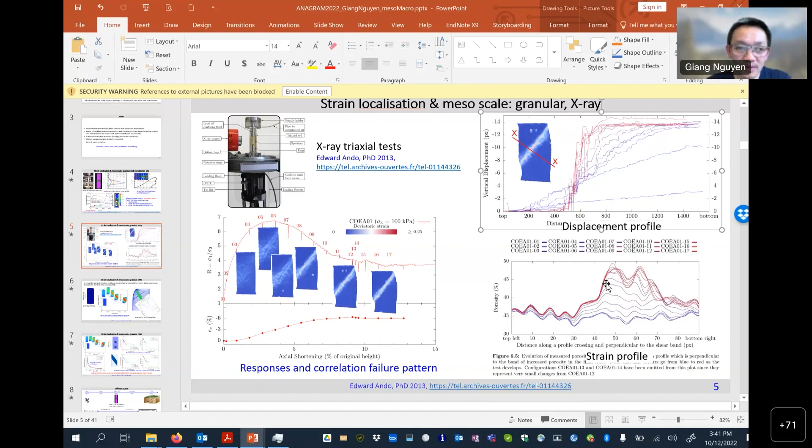And the last question from my end, if there is none from anyone else: you said somewhere inside the shear band and outside the shear band. Now, when we have to calibrate the kind of model that you are proposing, taking into account the multi-scale aspect, what experimental data does it have to work on? Because from experiments, getting within-band stresses is next to impossible probably. Yes, that's a good question too.

And practically, we can go with the way I show you here. I think it's in the first or second one. Yes. So this is the practical approach. Say we are not able to work out the true behavior inside the band, right? We can use the macro behavior, but we need to keep track of the size of the specimen. So if we run the test with that size, our constitutive relationship, after calibration with the data we get from that specimen, is associated with that size. So it should go with that size.

And in finite element, if you use a larger size, then you have to scale the constitutive behavior with the size. Right. We got some ideas. Some idea probably that the macro level behavior can only be mapped.